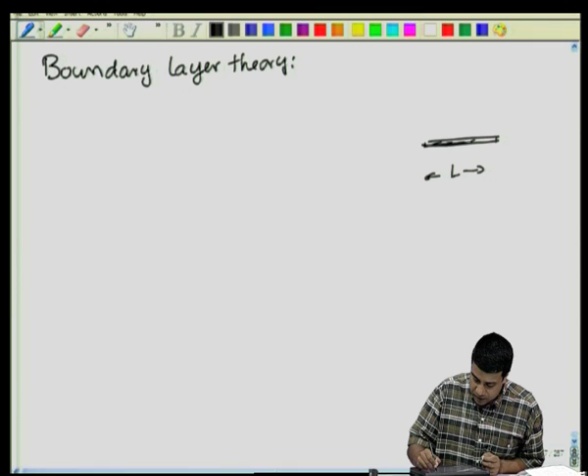The cross stream direction is perpendicular to the direction of the mean flow. There is a velocity u, which as I explained could in general be a function of x. And there is a thin boundary layer near the surface.

If you are outside this boundary layer, then viscous effects are small because the Reynolds number is large. However, when the thickness of this region becomes smaller and smaller, you have the velocity increasing to the outer flow velocity within a smaller and smaller region. So, as the thickness of this region becomes smaller, the gradients become larger - the cross stream derivatives of the velocity with respect to the y coordinate become larger. The viscous terms are proportional to the second derivative with respect to the y coordinate. So, if the length scale is sufficiently small, the derivative is sufficiently large, such that you can get a balance between the inertial and the viscous terms.

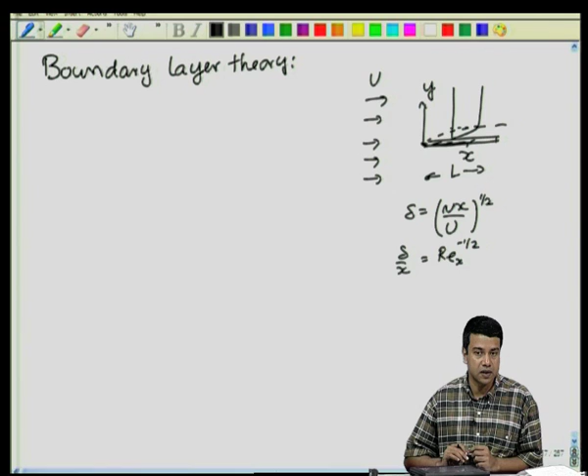And if you recall, we calculated what the boundary layer thickness should be. Delta is equal to nu x by u, to the power half. So, delta, the cross stream thickness, goes as the Reynolds number based upon x to the minus half. If the thickness goes as Re to the power minus half, then the viscous terms, proportional to the second derivative, are Re inverse larger than what you would simplistically expect if you just scaled the boundary layer thickness, the cross stream coordinate, by the distance x. And because of that, the inertial and the viscous terms become of equal magnitude.

So, as I said, you have an outer potential flow where you know what the velocity is. For that potential flow, the relevant length scale is the macro scale - the pipe diameter, the radius of the sphere in the case of immersed objects. In this particular case, it is the length of the flat plate L. Over length scales comparable to L, inertia is dominant and the viscous effects are neglected. However, for a thin region near the surface, viscous and inertial effects become of equal magnitude.

So, for the outer region, you have y goes as L, which means y star is defined as y by L, that is the relevant length scale. Within the boundary layer, you have y goes as delta, which means eta, which is equal to y by delta. The two of these solutions have to match in an intermediate region where y is large compared to delta, but small compared to L. That can always be realized because delta is Re to the power minus half, smaller than L.

Therefore, one can always find an intermediate region where y is small compared to L and y is large compared to delta. The two solutions - the potential flow solution in the limit as y by L goes to 0 - have to match with the boundary layer solution in the limit as eta, or y by delta, goes to infinity.

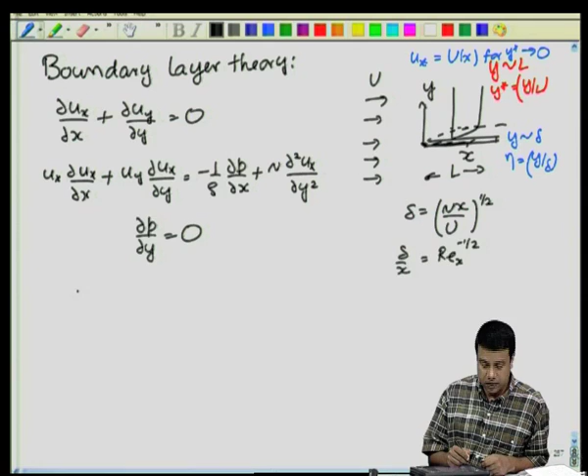Now, the pressure for the outer flow, for the potential flow, as y star goes to 0, the pressure is equal to minus half rho times u x squared plus u y squared. In the limit as y star goes to 0, u x is equal to capital U and u y is equal to 0. So the pressure just approaches P naught minus half rho u squared.

Therefore, dP by dx equals minus rho u du by dx. Since the pressure gradient in the y direction is equal to 0, the pressure in the boundary layer is independent of y, independent of the scaled coordinate in the y direction. Therefore, the pressure in the boundary layer is the same everywhere as the pressure in the outer potential flow in the limit as y goes to 0.

So substituting this, we got the x momentum conservation equation as u x partial u x by partial x is equal to capital U du by dx. Note that this capital U is now only a function of x, it is the y tending to 0 limit of the mean velocity in the potential flow.

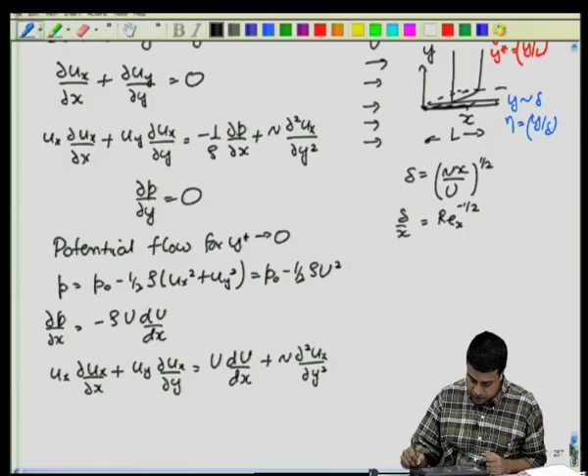So these are the boundary layer equations, which we had solved for different cases, for the flow past a flat plate and for the stagnation point flow. In the last lecture, we were asking the question, what is the form of the mean velocity and the boundary layer thickness which will admit a similarity solution for the boundary layer equations.

If you recall, the argument for a similarity solution was as follows. If I have a mean velocity profile, and if I have a boundary layer solution at a given location x within the flow, the solution for the velocity profile should not depend upon the total length L, because the downstream edge of the plate is downstream of this location x.

Therefore, the velocity profile should depend only upon x itself as well as the mean flow velocity capital U and the kinematic viscosity nu. And on that basis, we have obtained the boundary layer thickness at a specific location x measured from the upstream edge, as this one.

So we had got the solution for delta just based upon dimensional analysis, where U is in general a function of x. In the last lecture, we had stepped back and asked the question, what are the specific forms of delta and U which will actually admit a boundary layer solution.

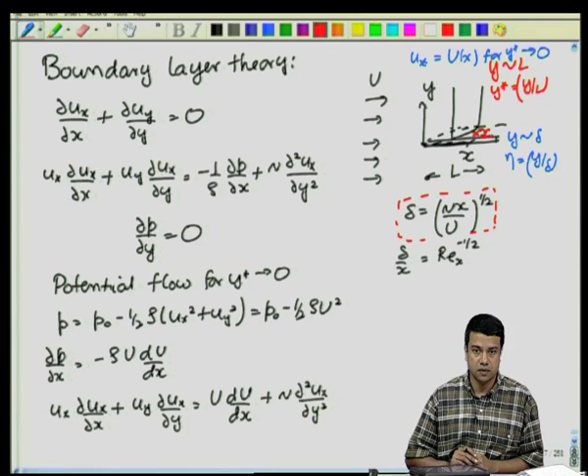So we had chosen as a starting point a postulate that we can write the stream function for the flow as U delta times f of eta, where eta is equal to y by delta of x. Note that the stream function, the velocities are related to the derivatives of the stream function, so the stream function has to have dimensions of velocity times distance, which this one does have if f is dimensionless. Both U and delta in this case are functions of x itself.

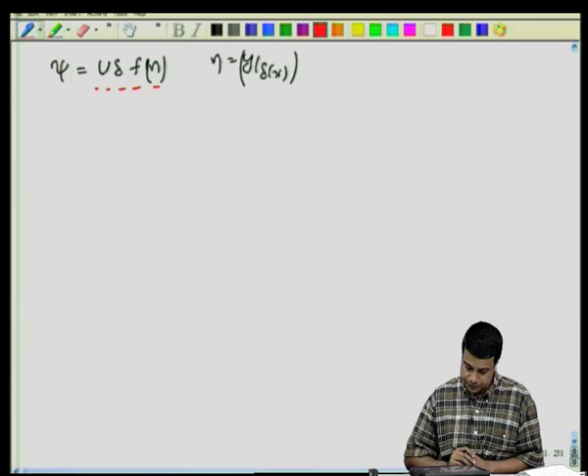So we chose this form, U is a function of x, delta is a function of x, and we used this to substitute into the mass and momentum conservation equations. When we express the velocity in terms of the stream function, u x equals partial psi by partial y and u y equals minus partial psi by partial x, the mass conservation equation is identically satisfied.

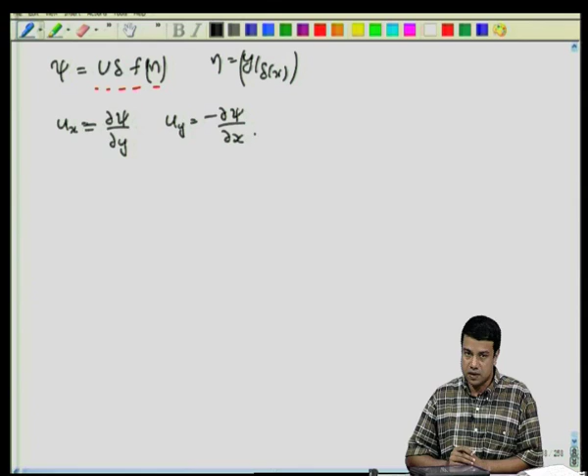The momentum conservation equation is given by u x partial u x by partial x.

If you recall, in the last lecture we had substituted u x, u y and its derivatives in terms of u and delta, and then simplified to get a differential equation for the function f itself. If I write eta equal to y by delta of x, then u x is just equal to u times df by d eta, where eta is a similarity variable. So u x equals u times df by d eta, and I have a second derivative of u x with respect to y here.

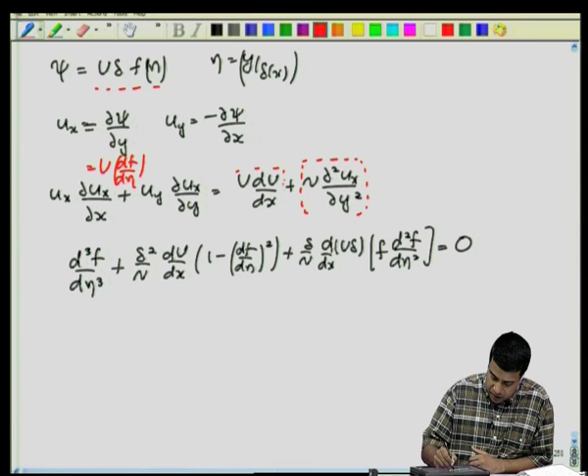And if you recall, we divided throughout by the prefactor of the highest derivative in order to get a dimensionless equation.

Obviously this equation admits a similarity solution only if these two functions are both simultaneously equal to constants. If they are not equal to constants, if they depend upon x, then the final equation I get is not an equation of f in terms of eta alone. It is only if these two are constants that I get a final equation which can be solved for getting f in terms of eta, and thereby getting the stream function of the velocities.

So therefore, in the last lecture we had said that delta square by nu du by dx is equal to some constant beta, and delta by nu d by dx of u delta is equal to some constant alpha. So this was the final solution we got. Both of these functions, delta is a function of x, capital U is a function of x. However, both of these functions given here have to be constants.

And we were looking for solutions that satisfy this. So rather than writing in terms of alpha and beta alone, we had shown you in the last lecture that 1 by nu d by dx of delta square u is equal to 2 alpha minus beta. Rather than using these two, my original equation I had to solve for these two. This third equation that I have is a combination of those two, a linear combination of the first two equations.

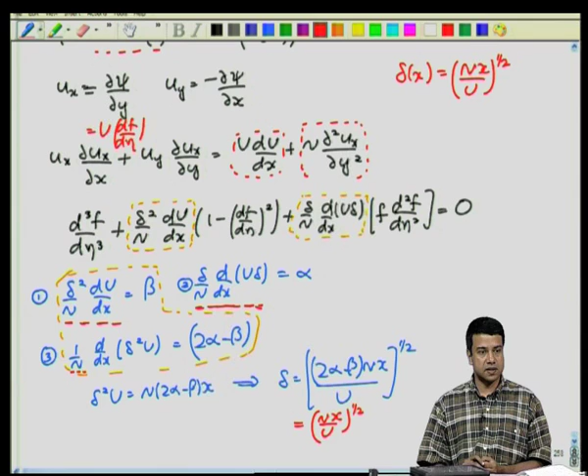It gives me a relation between delta and capital U. I have one more relation, which is equation 1, which I need to solve to find out what is the form of U that emerges. So, the first equation is delta square by nu du by dx is equal to beta.

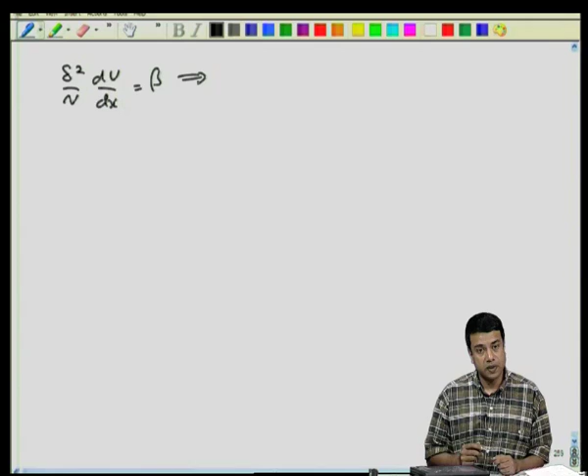Substituting my expression for delta: delta square is nu x by u, and I have 1 over nu du by dx is equal to beta. This tells me that 1 over u du by dx is equal to beta by x. Therefore, log u is equal to beta log x, or the solution for this is u is equal to, I'm sorry,

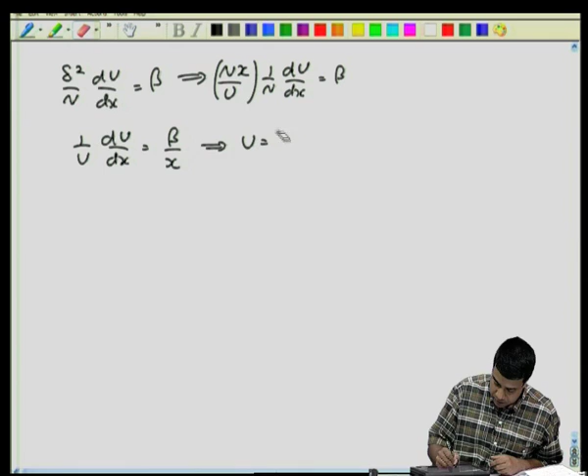k times x power beta. So, that is the solution for the velocity field. The velocity u of x has to be a power law in x in order to be able to obtain a similarity solution for this particular case.

What are those solutions, the power law solutions? Recall that u of x is equal to the limit, for the outer potential flow, as y star goes to 0, of u x of x. It is the limit of the outer flow potential velocity in the limit as y going to 0, is capital U of x, and that has a power law dependence upon x.

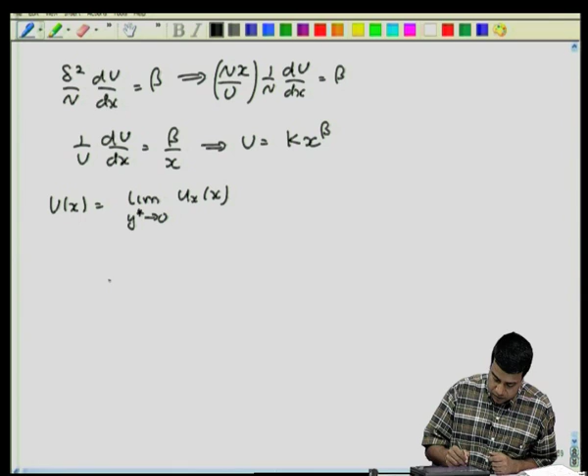What are those velocity profiles which satisfy this condition? We have already seen them when we solved the potential flow equations. If you recall, when we did potential flow, the flow within a corner—

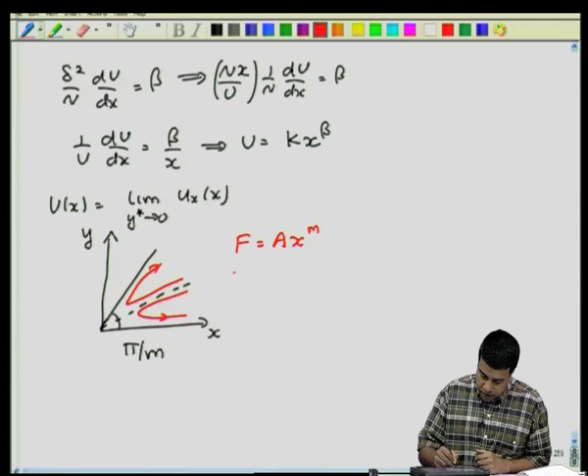of angle pi by m, the flow within a corner of angle pi by m has a complex potential f, is equal to a times x power m — has a complex potential f equal to a times x power m, and the complex velocity is equal to m a times x power m minus 1. I should write this in terms of the complex variable z, m a z power m minus 1.

That is a complex velocity. This is equal to u x minus I u y, is equal to u x minus I u y.

So, a z for a complex potential basically corresponded to a constant flow. For m equal to 1, if you recall, we just had a constant velocity profile. For m equal to 2, we had a stagnation point flow. For m greater than 2, you have flow in a corner that looks like this.

You can also have m less than 1; the minimum value of m is a half, and m equal to a half corresponds to a flow that went like this. We had already seen this in our potential flow solutions. So, the complex velocity is m a z power m minus 1, which is x minus I y, I'm sorry, it is equal to u x minus I u y. We would also express it as u r minus I u theta times e power minus I theta.

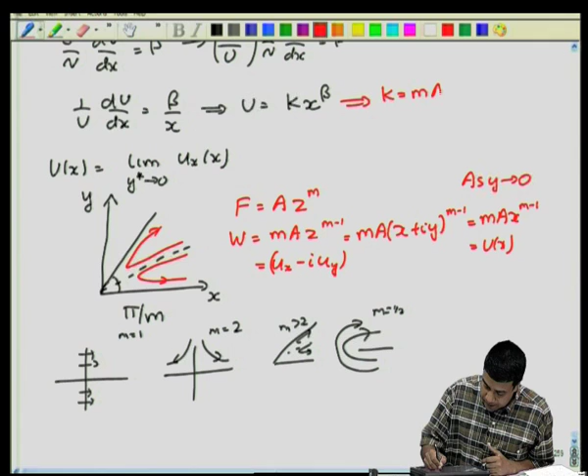In the limit as y goes to 0, this is equal to m a times x power m minus 1. So this is capital U of x. As you can see, it is a power law: m a times x power m minus 1. This corresponds to this velocity provided k is equal to m times a and beta is equal to m minus 1. So these are the flows, the flow in a corner for which the velocity u x in the limit as y goes to 0 has a power law dependence upon the x coordinate. For these particular velocity fields, we can get a similarity solution.

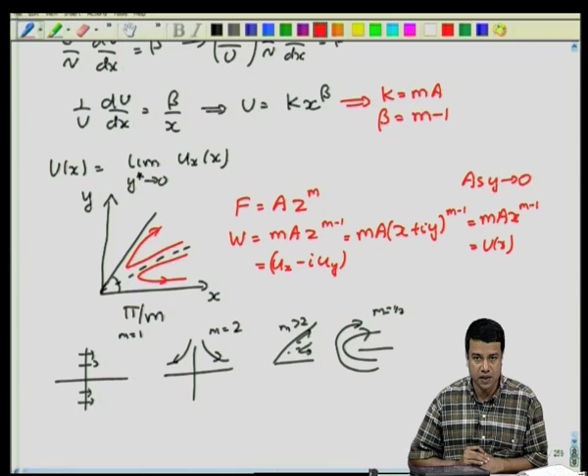And for that similarity solution, the equation that has to be solved, as you recall, is d cubed f by d eta cubed, plus delta squared by nu du by dx into 1 minus df by d eta the whole square, plus delta by nu d by dx of u delta into f d square f by d eta square, is equal to 0.

As you know, we have already solved for delta square by nu du by dx is equal to this constant beta, which is equal to m minus 1, for the corner flow. If we correlate the exponent beta to the exponent m for the complex potential in the flow through a corner, then beta is equal to m minus 1.

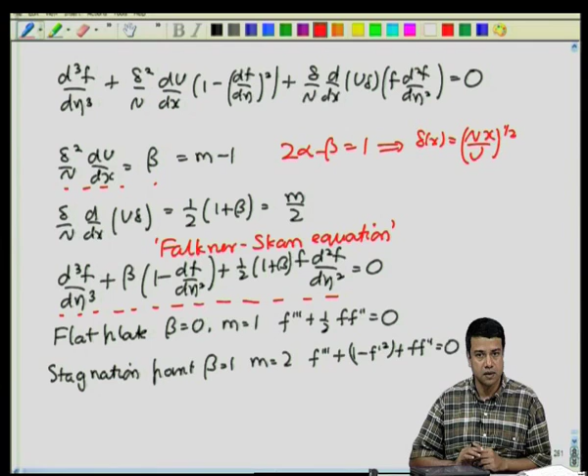For these solutions, delta equals nu x by u to the power half, which equals nu x by k x power beta, all to the power half. This is equal to nu by k power half into x power 1 minus beta by 2.

If you recall, for flow past a flat plate, m is equal to 1 and beta is equal to 0, because the velocity was not increasing — the exponent was 0 since the velocity was invariant with the x coordinate.

For the stagnation point flow, we found that m is equal to 2, beta is equal to 1. Then you have corner flows with acute angles for which m is greater than 2, and then you have obtuse angles. Let us just plot these.

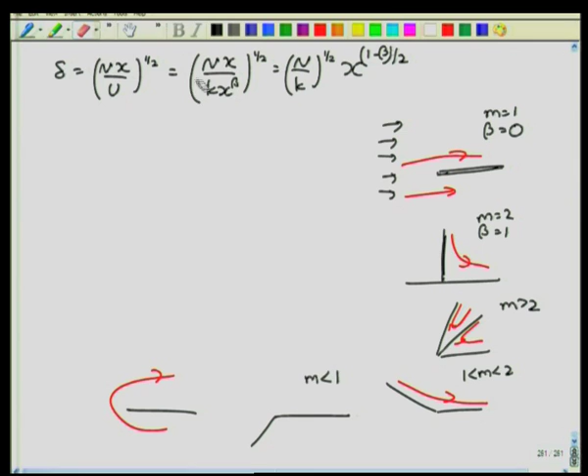And then you can also have the flow that goes something like this, and then you can have a flow that goes something like this, with m less than 1, and then you have this limiting case where m is equal to a half. So those are the different kinds of flow profiles that you can have in a corner.

So we only looked at these two, the flat plate as well as the stagnation point flow, as special cases. So for the more general flow profile, the boundary layer thickness goes as x power 1 minus beta by 2.

That means when beta is equal to 1, the boundary layer thickness is a constant — that is what we got for a stagnation point flow, for beta equal to 1 or m equal to 2. For beta equal to 0 or m equal to 1, you have a boundary layer which is increasing as you go downstream, with thickness going as x power plus half.

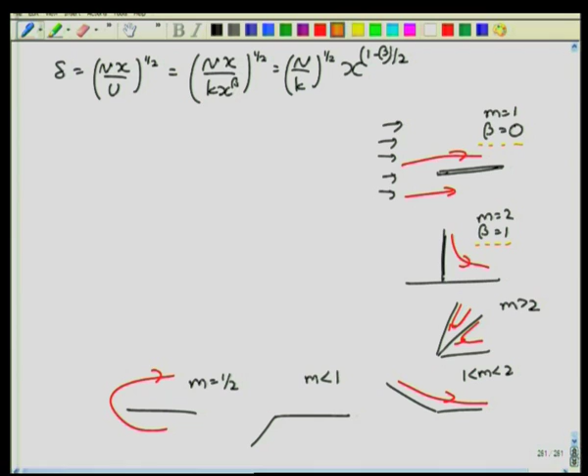In between these two, the boundary layer thickness goes as x power 1 minus beta by 2. So m greater than 2 means beta is greater than 1 here. In this case, where beta is greater than 1, you are having a boundary layer which is decreasing with downstream distance.

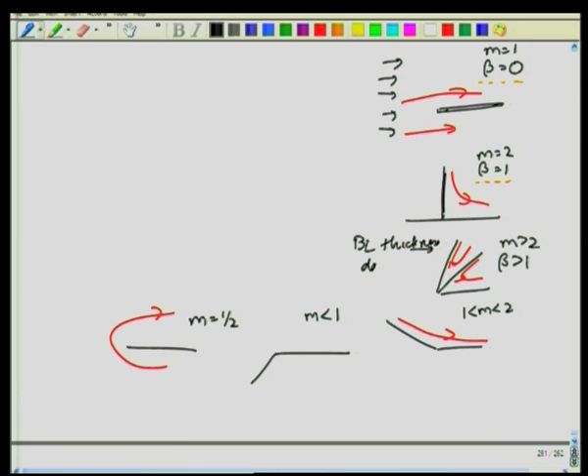So in this case the boundary layer thickness is decreasing. In this case the boundary layer thickness is a constant. And when beta becomes less than 0, or m becomes less than 1, you have a boundary layer thickness which is increasing with downstream distance.

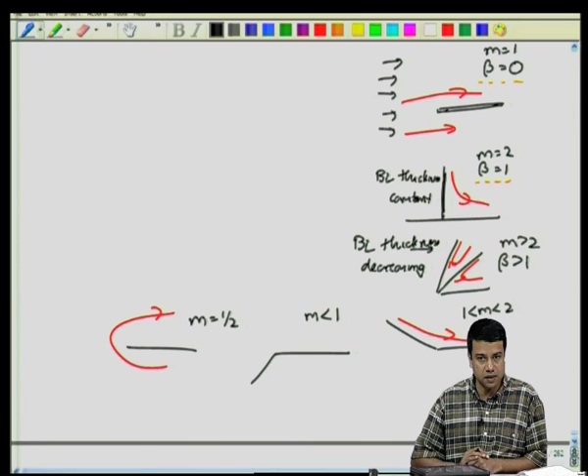So the boundary layer thickness depends upon this parameter beta — it depends upon the value of beta that you have.

Delta goes as nu x by u, so delta squared goes as nu x by u times d squared f by d eta squared. Recall that u x was equal to U times df by d eta, which means partial u x by partial y equals U by delta times d squared f by d eta squared.

So I should have delta here to the power half. This becomes mu U power 3 by 2, divided by x power half nu power half, times f double prime. So this is the expression for the shear stress.

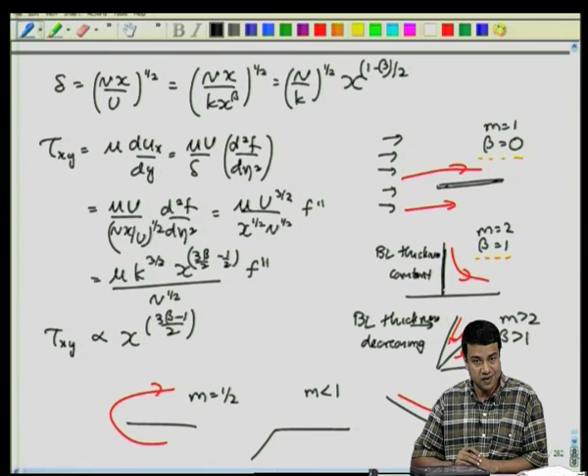Therefore, the shear stress increases downstream for 3 beta greater than 1, or beta greater than 1/3, whereas it decreases downstream for beta less than 1/3.

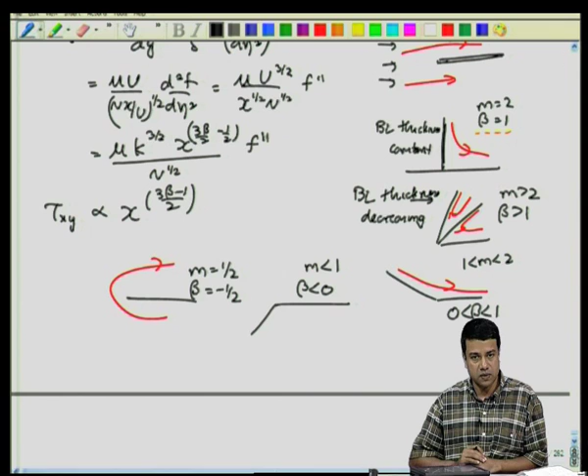So, m is between 1 and 2, that means beta is between 0 and 1. When m is less than 1, beta is less than 0, and m equal to a half means beta is equal to minus 1/2. So beta, which is m minus 1, goes all the way from minus a half to large values. As the value becomes larger, you get the flow in a corner of a smaller and smaller angle, because the angle is equal to pi by m, which will be pi by beta plus 1.

Depending upon the angle, you get either a flow that is accelerating downstream, because x power beta, if beta is positive, means the velocity increases downstream - an accelerating flow. If beta is negative, the velocity decreases downstream, meaning it is a decelerating flow.

For a constant flat plate flow, the boundary layer thickness increases as x power half. For a stagnation point flow, it is constant. If the angle is less than 90 degrees, the boundary layer thickness will decrease as you go downstream. If it is greater than 90 degrees, the boundary layer thickness will increase as you go downstream. And in between you have the stagnation point flow, for which it is constant.

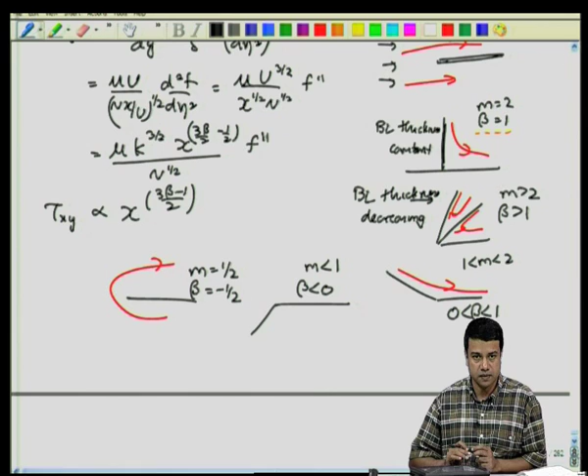If beta is greater than 1/3, then the shear stress increases downstream, whereas if it is less than 1/3, the shear stress decreases downstream. So this is the class of solutions for which you can get boundary layer solutions.

I went through this in detail to show that the boundary layer equation has a very specific form for all of these. This form can be solved exactly only for the case where the potential flow corresponds to the flow in a corner. However, these Falkner-Skan solutions for the boundary layer equations are important because they give us some intuition into the flow in other cases.

They give us insight into the flow in other cases, and let us go through that in a little more detail. So you get these numerical solutions for the Falkner-Skan equations.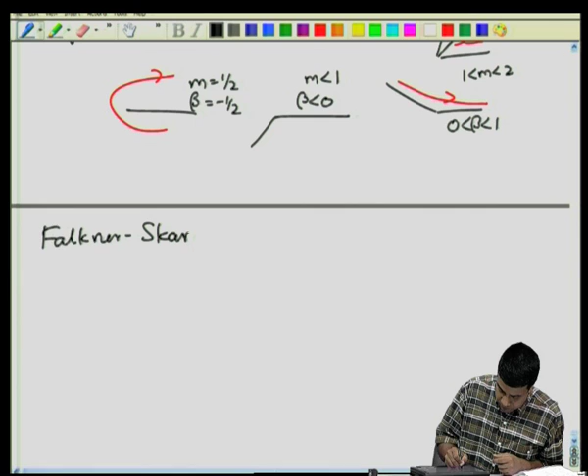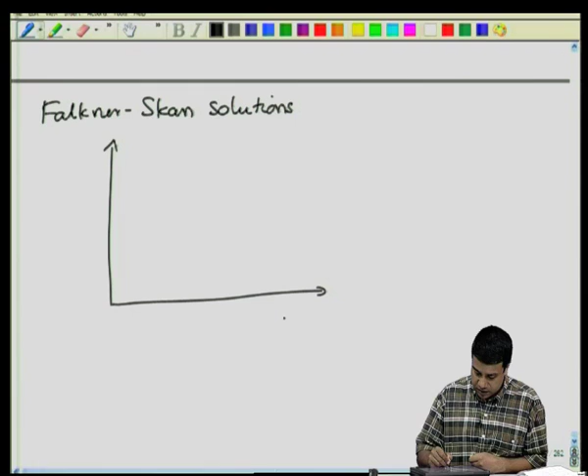Similar to what we had done for the flow past a flat plate and the stagnation point flow, I can plot eta, which is y by delta of x, on the x axis. In this particular case I have x and y. I could have a corner flow, but I still look at the distance from the y axis, scaled by delta, to get eta.

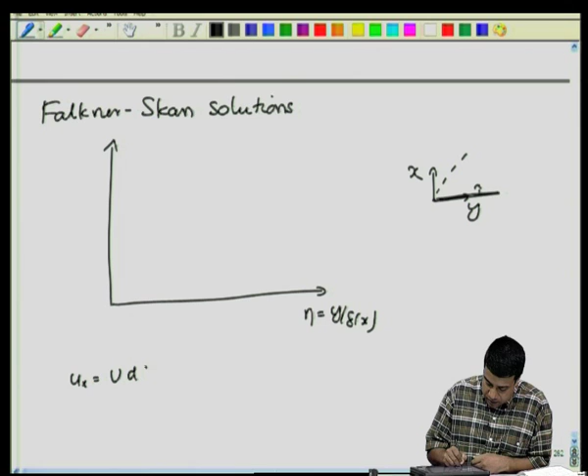I know that u_x is equal to U times df by d eta, where U is in general a function of x. Capital U is the velocity of the outer potential flow in the limit as y goes to 0, which means the scaled velocity u_x by U(x) is equal to df by d eta. So I can plot u_x by capital U equal to df by d eta.

Far away, you have to attain the free stream velocity capital U, that is, in the limit as eta goes to infinity, the velocity has to go back to the potential flow velocity. Eta goes to infinity while y star goes to 0 simultaneously. If u_x is equal to capital U, that means the scaled velocity is just equal to 1. So far away it has to reach 1.

And we looked at various solutions here. All of them depend upon the value of the parameter beta that we had, which was equal to m minus 1.

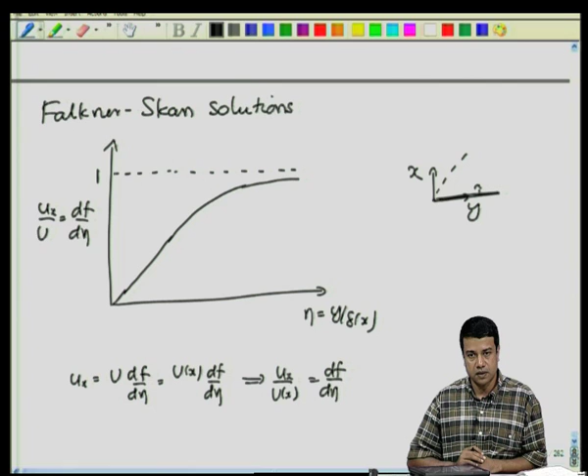For the Blasius flat plate boundary layer, where m was equal to 1 and beta was equal to 0, we got this solution here, which looks something like this. Note that the shear stress is proportional to d square f by d eta square, that means you have to numerically calculate the value of d square f by d eta square in order to calculate what the shear stress is. So let's call this m is equal to 1, beta is equal to 0. This is the flat plate Blasius solution for the boundary layer.

If you plot this for the stagnation point flow, you find that it goes something like this. It of course approaches 1, but it approaches it faster. The reason is that the boundary layer thickness is constant, and therefore the flow is accelerating downstream. So this becomes, for m equal to 2 and beta equal to 1, the stagnation point flow. And as you increase even further, you will get something like this.

This is for m greater than 2. What happens if m becomes less than 1? That corresponds to something that does not have a constant velocity far away. If you recall, m less than 1 corresponds to a flow that looks something like this, for m less than 1 or beta less than 0.

If I took a solution for m equal to... qualitatively, if I take beta equal to minus 0.05, I will get something like this. It approaches 1 much slower. I have exaggerated that here, but it approaches 1 much slower.

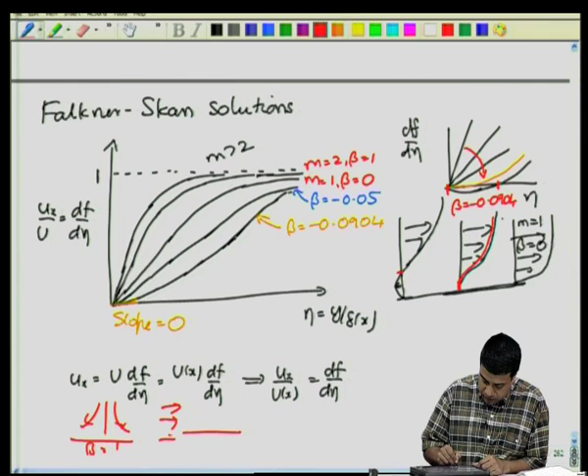So if you recall, this was beta equal to 1, beta equal to 0 was just this one. Beta becoming less than 0 would correspond to a flow that goes something like this, m less than 1 or beta less than 0. For beta less than 0, you find there is a velocity profile which has a backward circulation very close to the surface. When beta reaches minus 0.0904, the shear stress becomes 0. As it decreases below that, you have a region where there is a backward circulation very close to the surface.

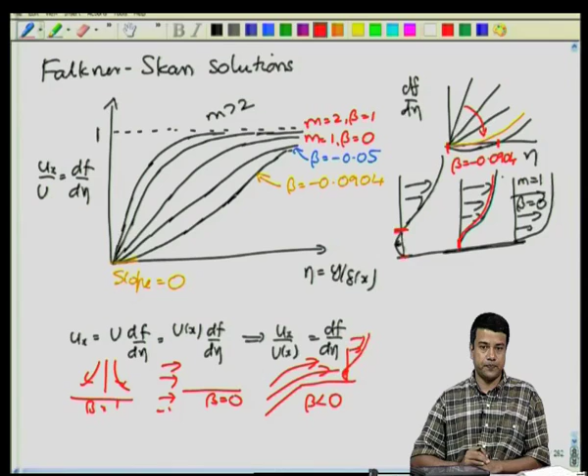So, what that means is that there is a separation of the boundary layer from the surface. There are 2 points at which the velocity is equal to 0: at the surface itself, and at an intermediate point within the flow. In between, the velocity is going backwards. That is when you have a boundary layer in which the velocity is decelerating.

Note that for a flat plate, the velocity is a constant. For the stagnation point flow, the velocity is accelerating downstream. For the flat plate, it is a constant. When you make the angle greater than 180 degrees, the velocity actually decreases because beta is negative. U goes as x power beta, which goes as a negative power of the downstream distance. So, this is a decelerating velocity profile.

So, these are specific solutions for the boundary layer equations for the particular case where the velocity had a power law dependence upon the x coordinate. How can this be used to understand flow past a general object? Let us look at the simplest case. I will take the flow past a cylinder. Simplest is to consider a 2-dimensional cylinder.

My potential flow solution predicts a symmetric velocity profile, which we had obtained using complex variables previously. The potential flow is predicting a velocity profile that is symmetric about this plane of symmetry. What about boundary layer theory?

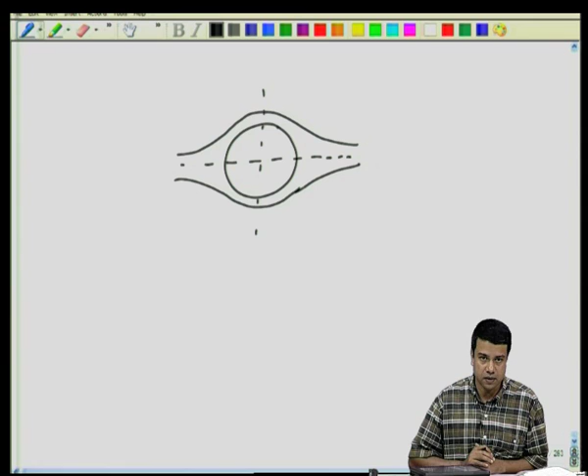I can calculate the boundary layer thickness locally based upon the local mean velocity and whether it is locally accelerating or decelerating. As I showed you, the mean velocity here corresponds effectively to a stagnation point flow, for which beta is equal to 1 or m is equal to 2, where the velocity increases proportional to x as you go downstream.

In this particular case, this is the x coordinate, and this cross stream direction is y. So long as the boundary layer thickness is small compared to the radius of curvature, this corresponds to a stagnation point flow, where the velocity increases proportional to x. As I go downstream, that acceleration decreases. Of course, at the upstream edge, it has to accelerate to go around the object.

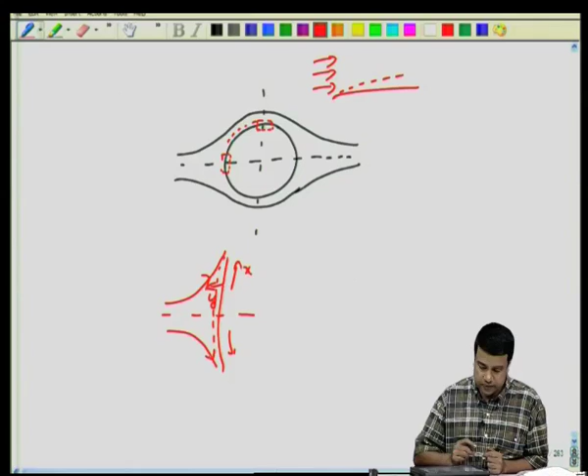As I go around, the acceleration decreases until I come to a point which basically corresponds to flow past a flat plate, because the flow is tangential to the surface and the velocity is nearly constant. For that, you have a boundary layer increasing proportional to x power half. In this case, the boundary layer is constant. So, this corresponds to beta equal to 1, and this corresponds to beta equal to 0, the flat plate.

If I go a little bit downstream of the top and bottom of the cylinder, I will come to a flow which basically looks like this. There will come a region at which beta is equal to minus 0.0904, slightly behind the upper and lower surfaces, where beta becomes negative. At the upstream edge stagnation point, it is 1; at the top and bottom it is 0.

If you go a little bit downstream, it will become negative, and once it becomes negative, the shear stress is going to go to 0. Here you have a velocity profile which is basically a Blasius boundary layer profile. If you go a little bit downstream, once beta becomes minus 0.0904, the shear stress at the surface goes to 0.

And if you go a little further, you will have a region where there is recirculation at the back, where the boundary layer has come off the surface. There is a region where the flow is in the opposite direction very close to the surface, and then another point at which the velocity is equal to 0. So, there are 2 points at which velocity is equal to 0, one at the surface itself and the other a little distance away in the decelerating portion behind the sphere.

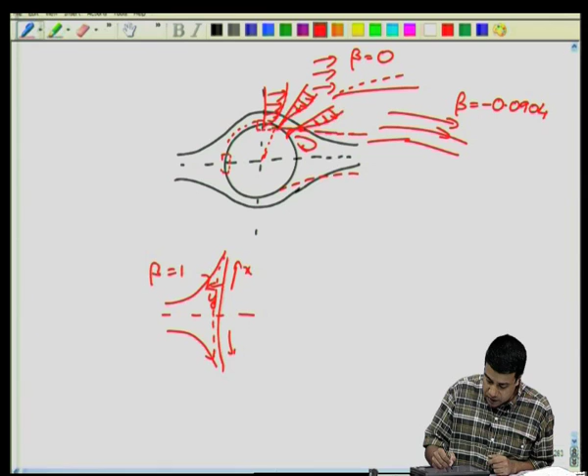And if I plot the locus of all points at which the velocity is equal to 0, I will get something that goes like this. Within this region, because the flow is going opposite to the mean flow, I am going to get a velocity profile that goes like this, recirculating in this region.

So, at this point where the shear stress is equal to 0, that is where you see the start of a recirculating region behind the sphere. Because this boundary layer comes off the surface, there is another location at which the velocity is equal to 0. Within the region traced out by these two, where the velocity is equal to 0, you have flow going in the opposite direction. This region is called the wake, where the flow is going in the opposite direction.

The reason is because behind the sphere you have a decelerating potential flow velocity. In a decelerating potential flow velocity, if the value of beta goes below minus 0.0904, there is a recirculation at the back and the boundary layer separates from the surface.

You have another surface on which the mean velocity is equal to 0, which goes all the way into the fluid. Between these two regions, you have a wake region where the flow is recirculating in the opposite direction. That is why potential flow solutions are not applicable for bodies where there is separation in the decelerating flow.

The boundary layer solution tells us that when there is deceleration in the outer velocity, the boundary layer separates from the surface, and the potential flow solution is no longer valid there. There is a wake region with recirculation of the velocity, and the velocity close to the surface is opposite to the direction of the mean flow.

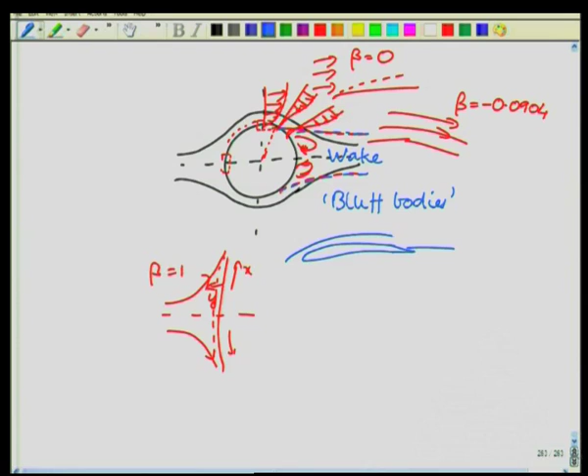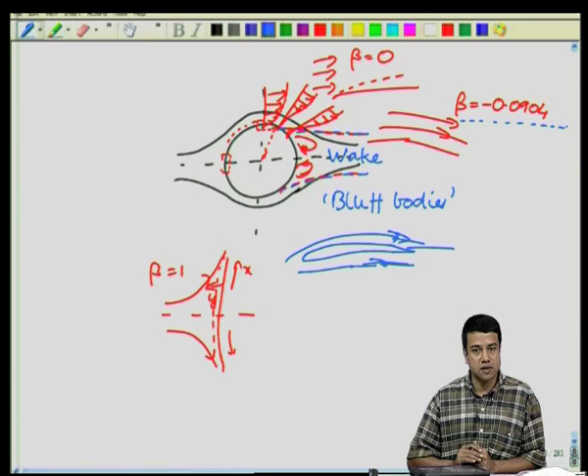The flow around it is such that there is no deceleration anywhere along the flow, or the deceleration is sufficiently small that beta never reaches this critical value. If beta never reaches this value, you will never have separation of the boundary layer. The shear stress on the surface will always be non-zero, and you will not have separation.

This is why boundary layer theory is important. Even though potential flow predicted a solution everywhere, boundary layer theory tells us that at certain locations, if the velocity is decelerating, the boundary layer will separate from the surface, and the potential flow equations are no longer valid in that separated wake region. In that wake you have to analyze it separately, because the potential flow solution is no longer valid, and because the pressure is very small there, the drag force you get is due to the pressure exerted by the potential flow on the upstream side.

So this completes our discussion of boundary layer theory. We managed to get solutions for a very specific case, corresponding to potential flows in a corner. Only for this particular case were we able to get analytical solutions for the boundary layer equations, but the intuition we developed is more general - the thickness of the boundary layer, its dependence on kinematic viscosity and the mean velocity profile, and what it tells us about boundary layer attachment to surfaces and separation in decelerating flow. These are far more general concepts, important because they tell us about the limitations of potential flow.